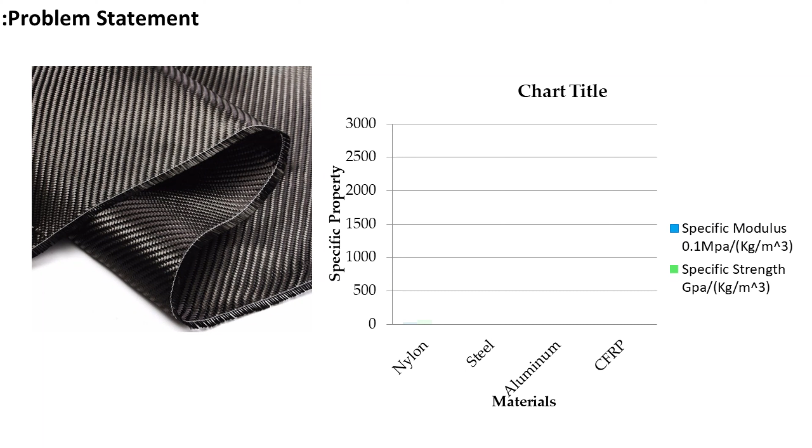To begin with the problem statement, carbon fiber is considered as one of the strongest lightweight materials in the industry. It has 5 times more specific modulus and 10 times more specific strength than steel. Comparative analysis shows that by shifting from tubular to CFRP chassis, more than 50% of chassis weight reduction is possible, which can save up to 6.8% energy of the vehicle.

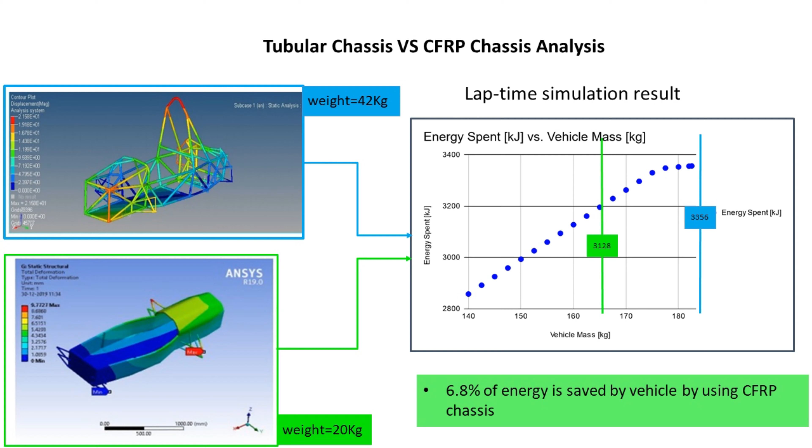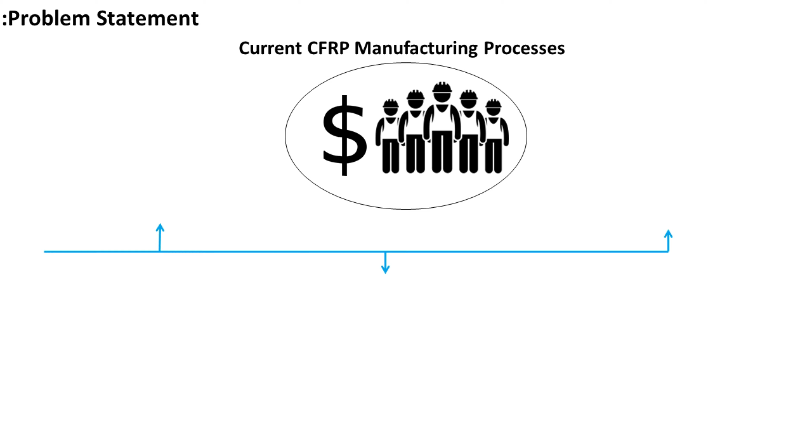Then why are we not seeing this material used in applications where low weight is a performance criterion? The main reason behind this is that composite manufacturing is a costly and labor-intensive process that needs a complex method of manufacturing involving mold making, vacuum bagging and autoclave. Because of these reasons, CFRP applications are limited to high-end cars and aerospace applications.

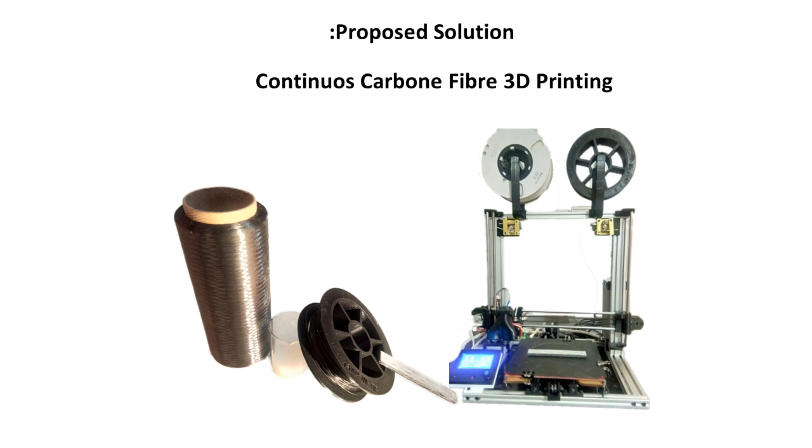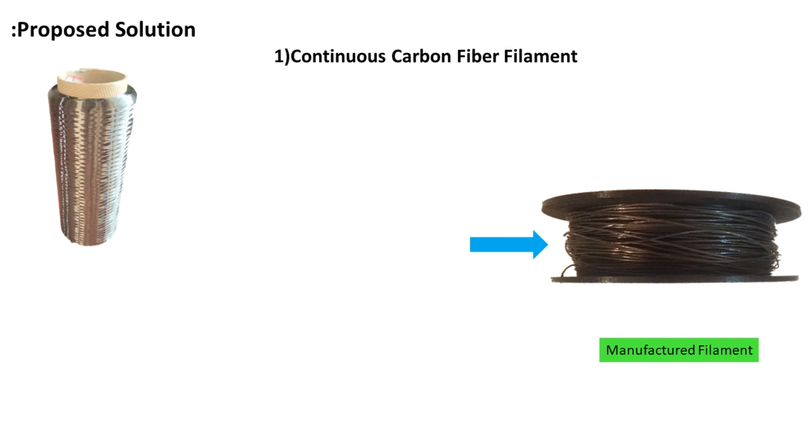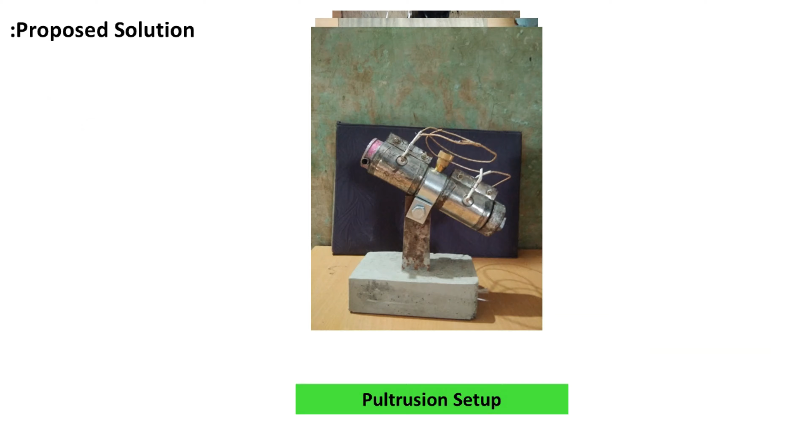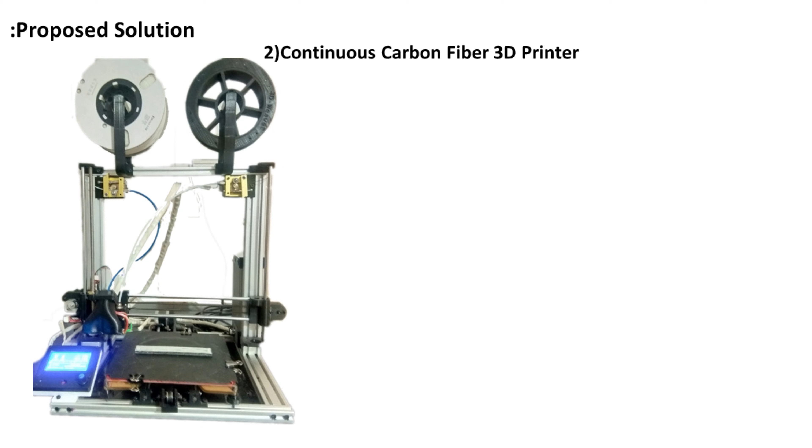To this problem, we are proposing the solution of continuous carbon fiber 3D printing. This project is mainly divided into two parts. First, manufacturing of continuous carbon fiber filament, which involves impregnation of carbon fiber tow with nylon 6, which results in 3D printable carbon fiber filament. After 8 months of prototyping, we have designed and manufactured a pultrusion setup which has a production rate of 30 meters of filament per hour. This manufactured filament can be used to print any structural part through our continuous fiber 3D printer.

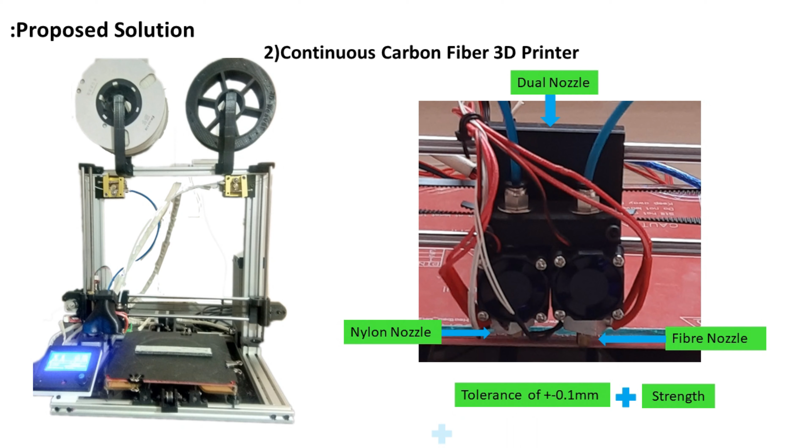In this printer, the first nozzle does the fiber printing, which gives the printed part exceptional strength, and from the second nozzle, nylon printing is done on the surface of the part, which provides a tolerance of plus minus 0.1 mm along with good surface finish. Tensile testing of the printed part showed it has a specific strength of a whopping 1.42 times that of mild steel.

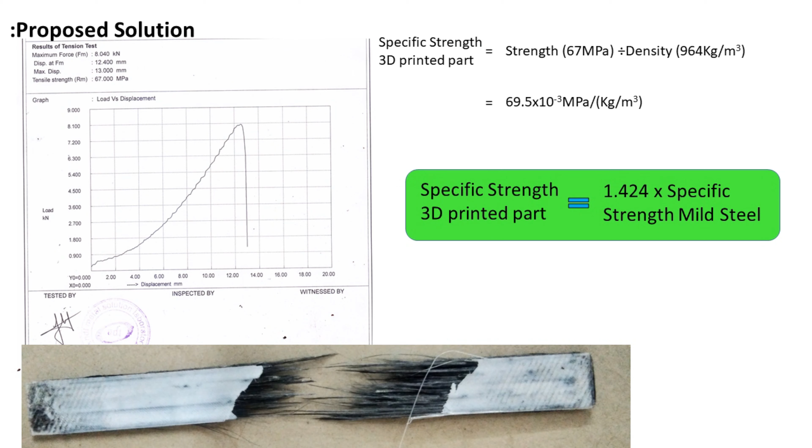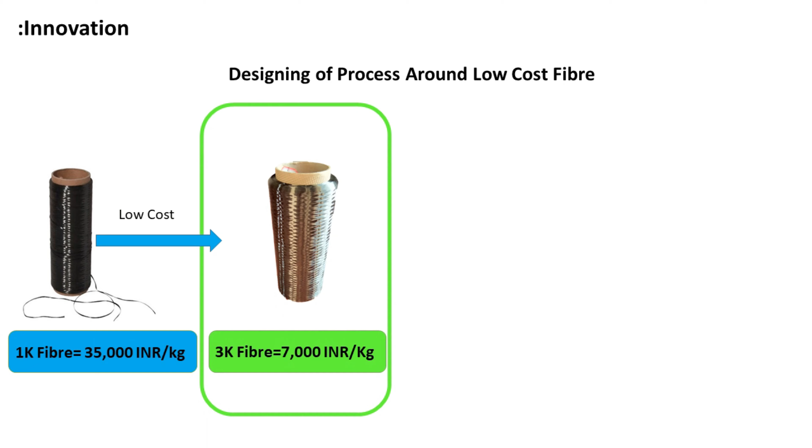Innovation in our project is that instead of using 1K carbon fiber, we have designed our solution around low cost 3K carbon fiber. Furthermore, thermoset carbon fiber parts require 380 megajoules of energy per kg for recycling, while continuous carbon fiber 3D printed parts require only 80 megajoules of energy per kg for recycling.

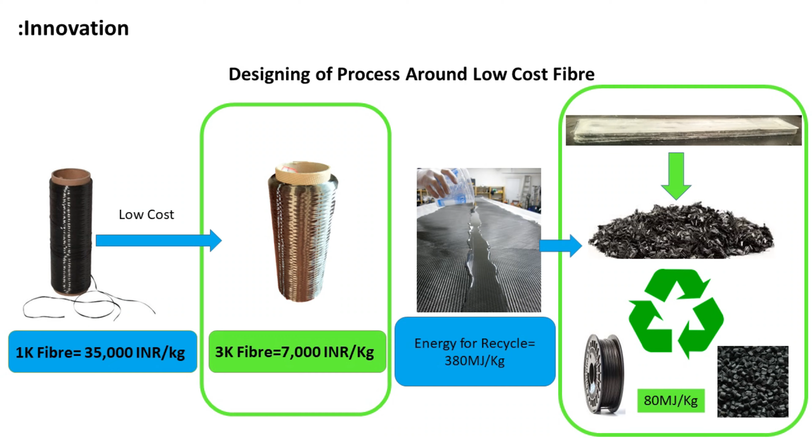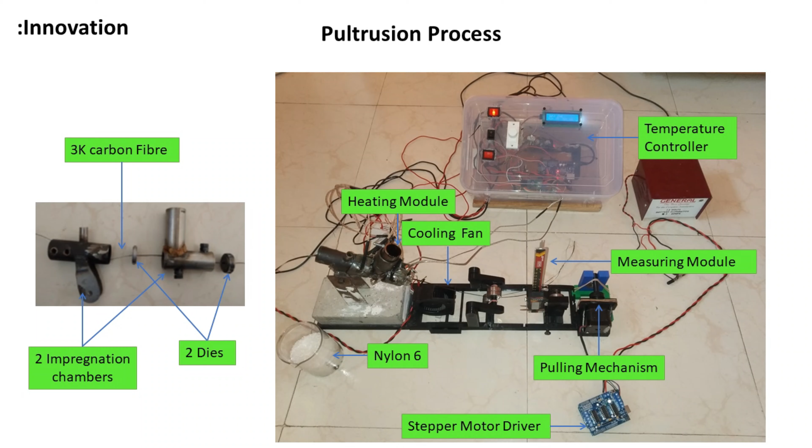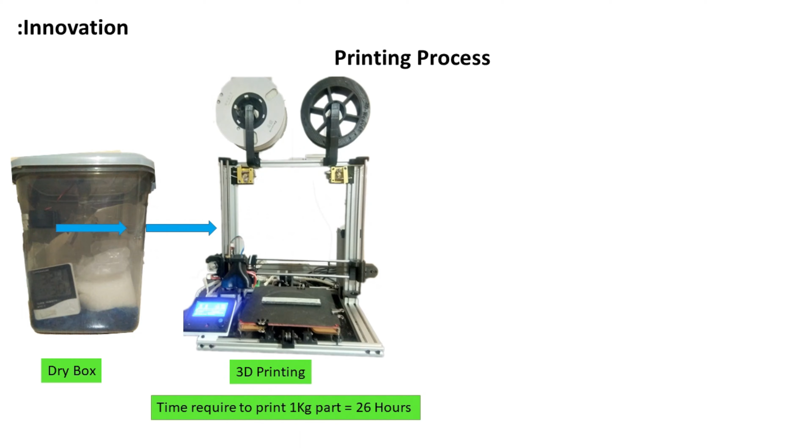In the pultrusion process, the setup is designed from the ground up for fiber impregnation with the thermoplast. For proper impregnation, a two chamber and two die design is implemented. To tackle the issue of moisture absorption by the filament, a dry box is implemented. After drying of the filament, the 3D printer can print a 1 kg part within 26 hours. For printing of the part, the printer follows a continuous path without breaking the fiber.

Because of this innovation, we have the competitive advantage of being the first mover. We are vertically integrating the business. We have the geographical advantage of cheaper development and operational cost. In addition to that, we have also developed the minimum required technology.

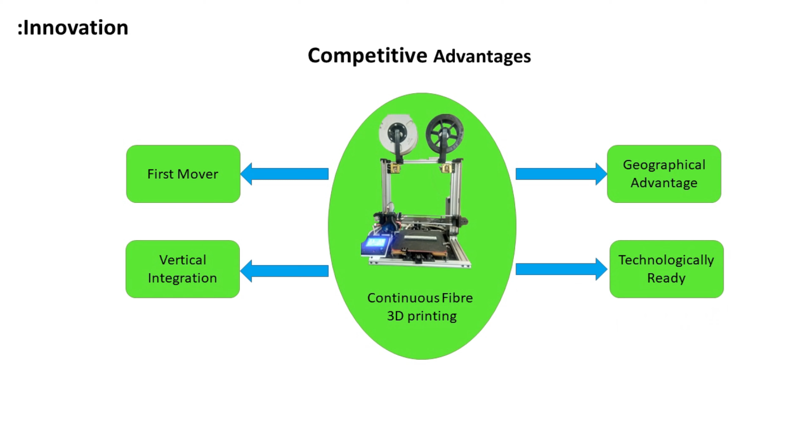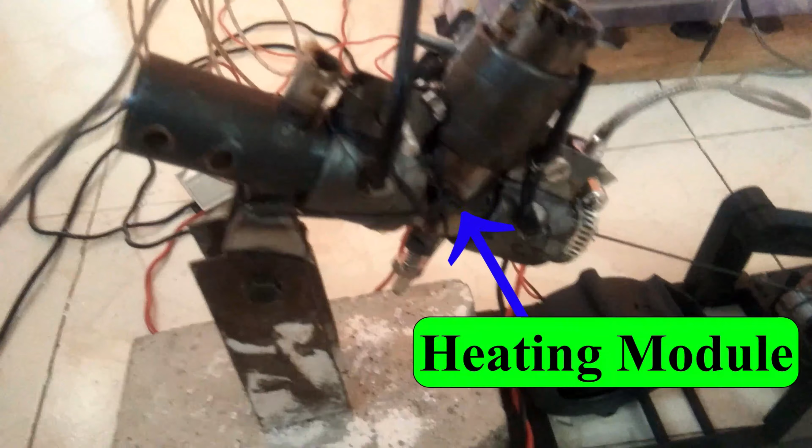We use 3K carbon fiber and nylon 6 to manufacture this filament. A heating module melts the nylon 6 while the cooling module quickly cools the filament. The alignment module ensures that the fiber is at the core of the filament while the pulling module ensures a uniform pulling rate. The temperature control unit avoids solidification or fuming of nylon.

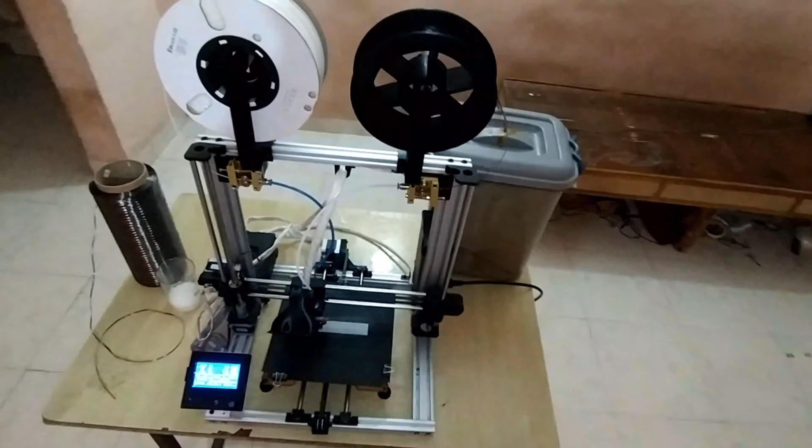This is our dual nozzle design 3D printer. It prints the manufactured filament from one nozzle for strength, and nylon from the other for surface finish. It uses a dry box to keep the nylon and the filament dehydrated.

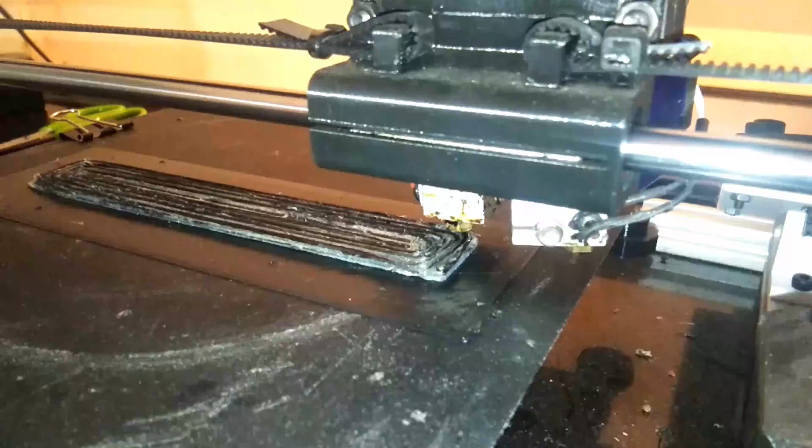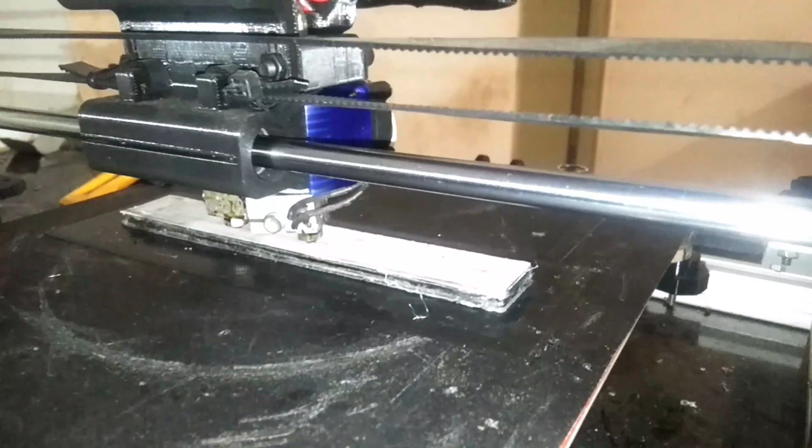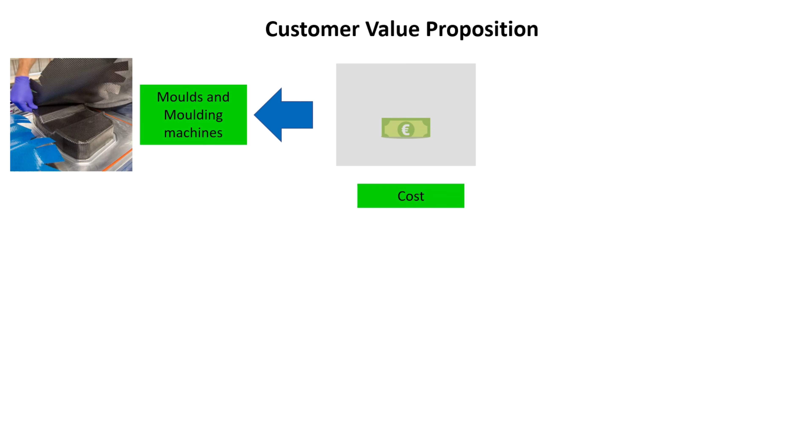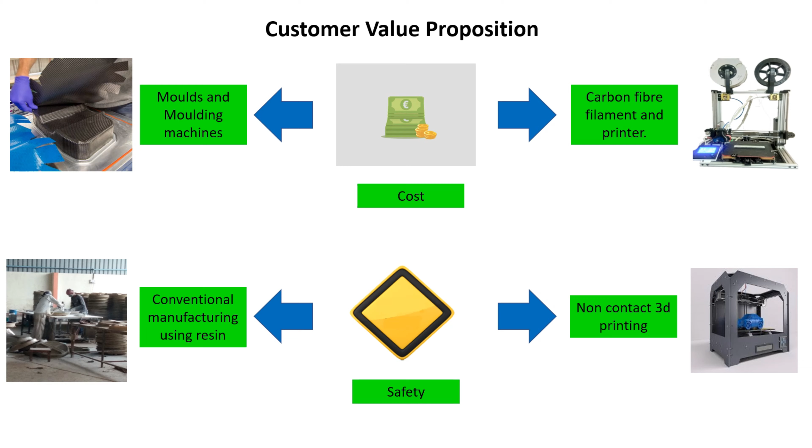Customer value proposition. In terms of cost, current carbon fiber manufacturers use molds and molding machines, which are very costly. On the other hand, 3D printing requires filament and a printer, which come cheaper. In terms of safety, workers are currently working with resin, which is harmful for their skin, and carbon fiber grinding, which is harmful for their lungs. On the other hand, 3D printing's non-contact manufacturing keeps the workers safe from any harm.

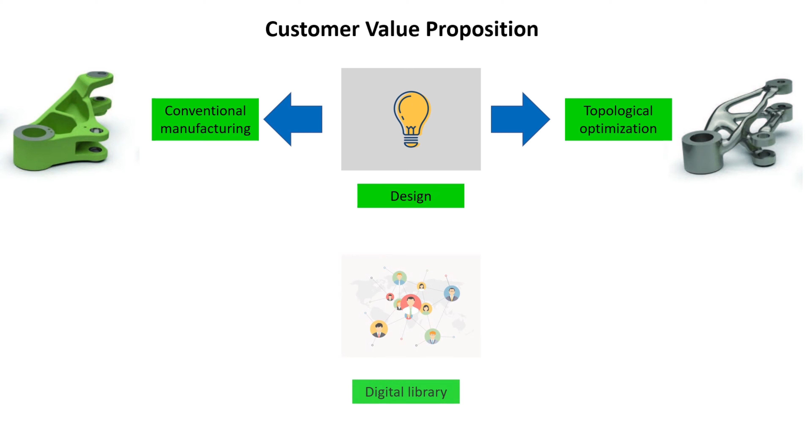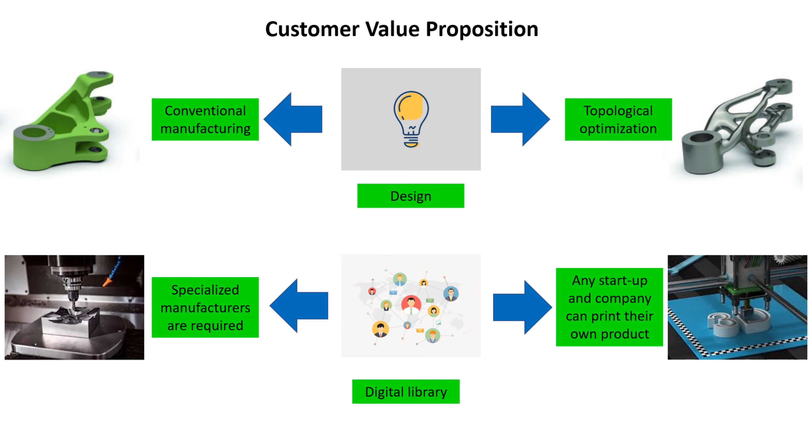In terms of design, conventional manufacturing handicaps the designer by following certain manufacturing rules. On the other hand, any topologically optimized design can be printed on a printer. Digital libraries. Startups and companies need specialized manufacturers to manufacture certain products. On the other hand, any startup or company can print their own product, which can reduce cost and energy of manufacturing and transportation.

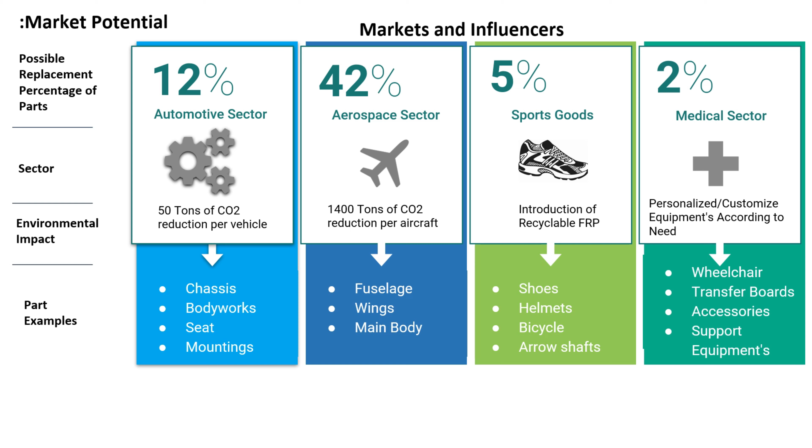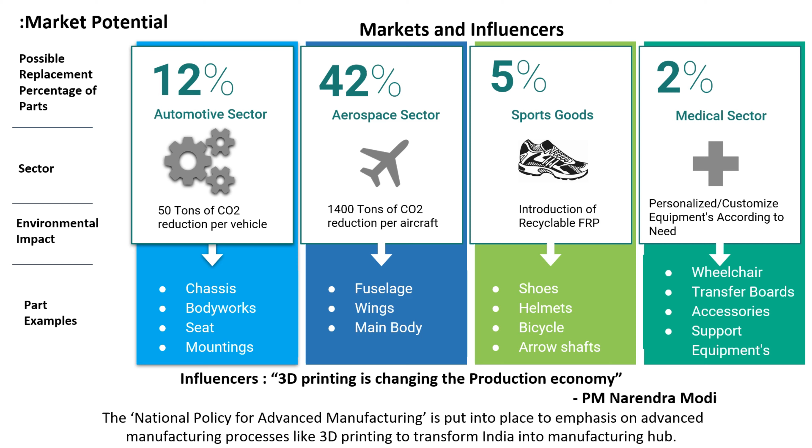As PM Narendra Modi has rightly said, 3D printing is changing the production economy. Hence, the national policy for advanced manufacturing is put into place to emphasize advanced manufacturing processes like 3D printing to transform India into a manufacturing hub.